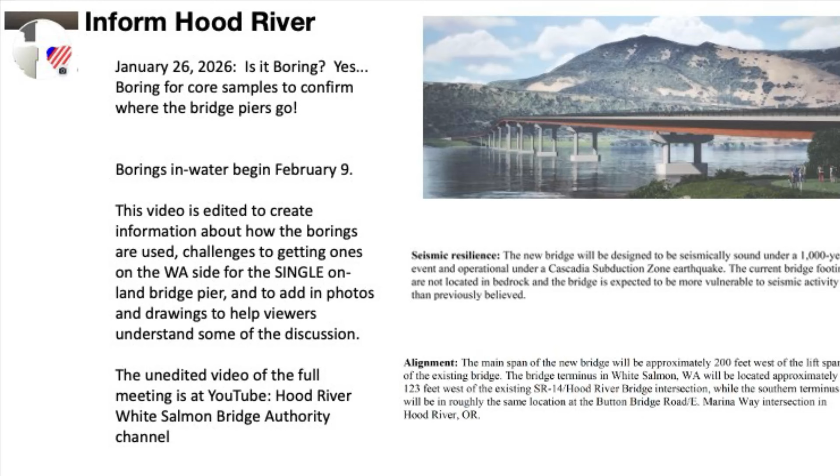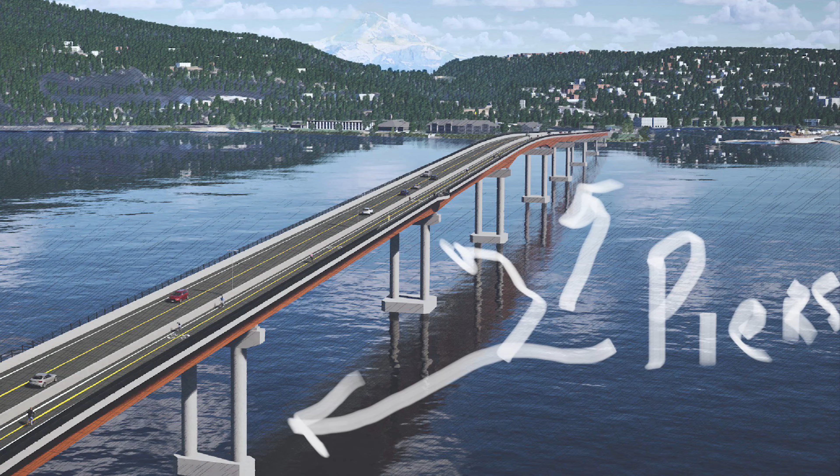The week of February 9th, the geotechnical crew begins boring at the pier locations for the new bridge, starting in water on the Oregon side. These borings will drill 2-inch diameter holes to take core samples deep into the soil to confirm that the bridge piers will be footed into bedrock. That's critical to building a seismically sound bridge. The current bridge footings aren't in bedrock.

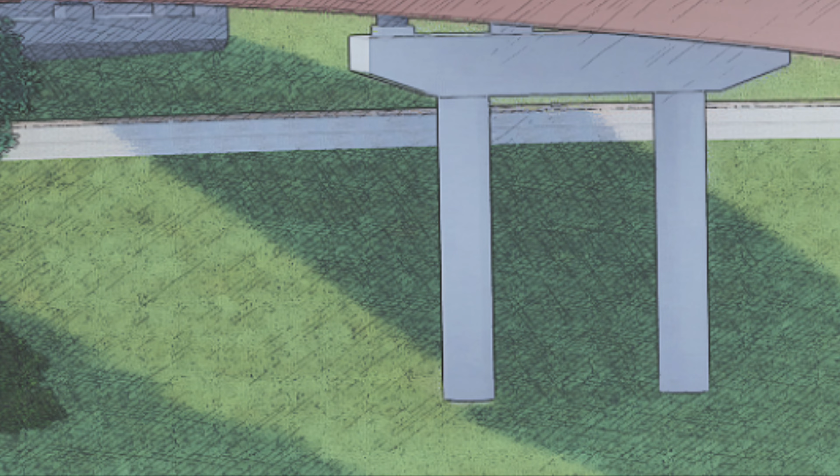The challenge, again, is access on the Washington side. The Washington side has one on-land pier, and that's located in an area with an easement held by the Army Corps of Engineers, where it'll take 6 months to get a permit to go in there and drill. But the team has a plan to move 15 feet away, and they believe that will give them a workable solution. Let's hear how that will happen.

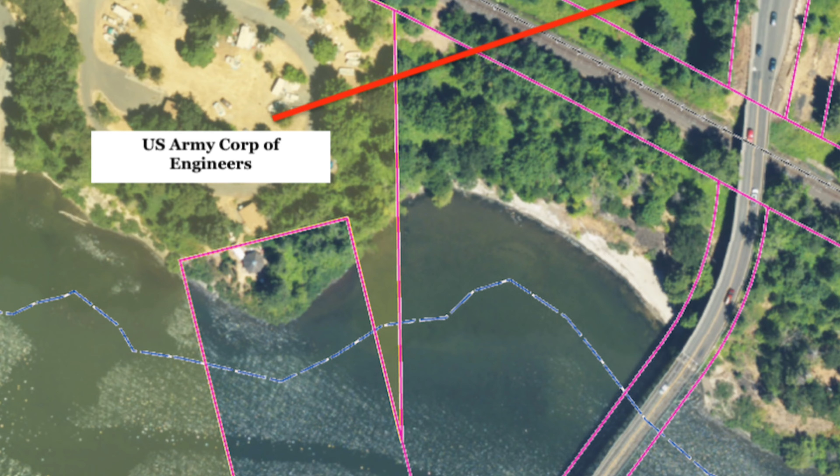In-water borings also are going to be starting here still on February 9th. So they'll start on the Oregon side. Hopefully by the time they get done with the Oregon borings, we will have the permits for them to move straight into the Washington side. We're also looking at access for the Washington on-land borings in between the railroad and the water. There's 2 borings there. We're making sure we're staying outside of an Army Corps easement. If we have to do it in that easement, it's about a 6-month permitting process to get access.

So on the borings, I thought that the U.S. Coast Guard was the permitting authority. Oregon has its own permitting, and then Washington has its own permitting processes, and some of those require different levels of reviews. And because of this access issue, you're thinking about moving those core samples just outside of that envelope, which would be roughly 15 feet away.

Yes. When you do the surveys, are you going to show where you want to do it legally? Yeah. And are you also going to show the center of the other ones and how far away they truly are? We can shoot those in. I would urge you to shoot them in. What are you worried about? I want to just make sure that from what we can see, the contour of the land, if it's off the cliff, that's one thing. If it's similar ground, at least from the surface, it gives you a little bit more warm fuzzy that you're in the ballpark.

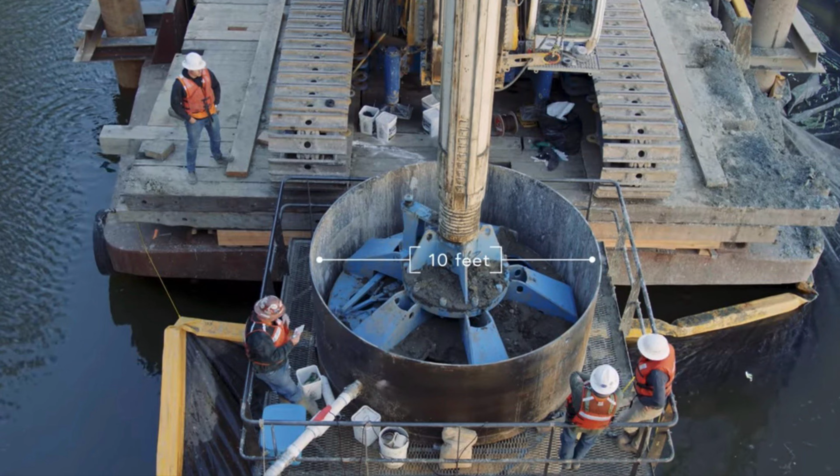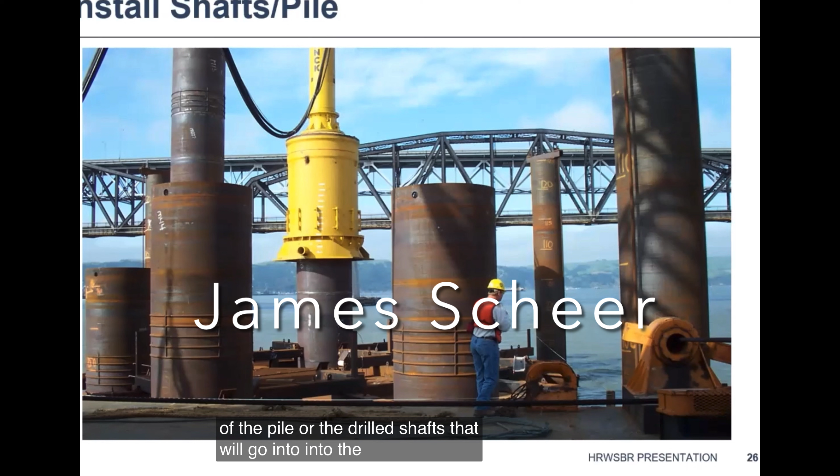Let's step back and learn a little bit more about these steel shafts sampling and what the team is trying to accomplish and why the positions matter so much. This is an example of the pile or the drilled shafts that will go into the water. These shafts in this picture are about 10 foot in diameter. Currently ours for the Hood River-White Salmon Bridge are going to be over 9 foot in diameter. It's a 9-foot shaft, a 2-inch core sample in a 9-foot circle.

The odds of you being homogeneous all the way across that 9 foot is probably... Yeah, as with anything, when you take the boring, the farther away you are from that hole, the more risk there is. Potential variability in the distance you are away, right? So if we have to take it at 15 or 20 or 30, the farther you get away, the more risk there is. And that affects pricing and risk assumptions and risk allocation for the contractors.

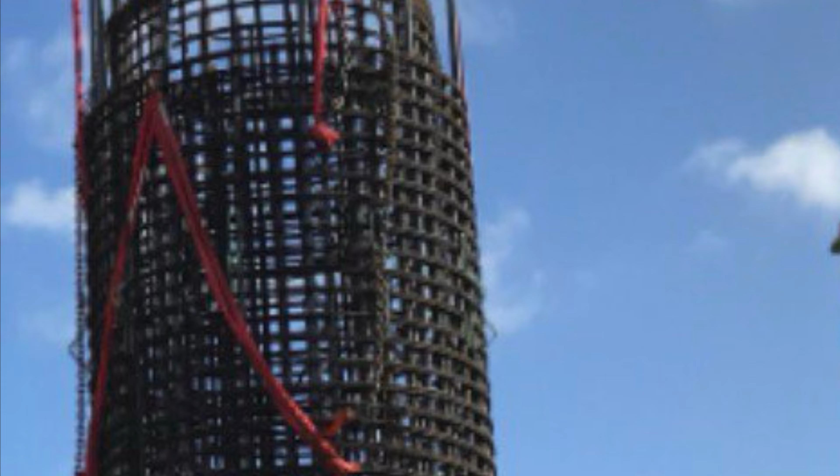The big thing is the rock elevation, wherever you hit good, competent rock, because we have to drill like 2.5 diameters, 9 foot times 2.5, into the rock. And then you have a rebar cage that's a fixed length. So you go build those rebar cages. They take a week or more to build each rebar cage. And then if you hit rock at a different place, you need a different length of rebar cage. You got to go rebuild the rebar cage and things like that. It might affect your design. So there's a level of risk. But the real issue we're trading is we're moving over 15 feet, so we don't have to lose 6 months.

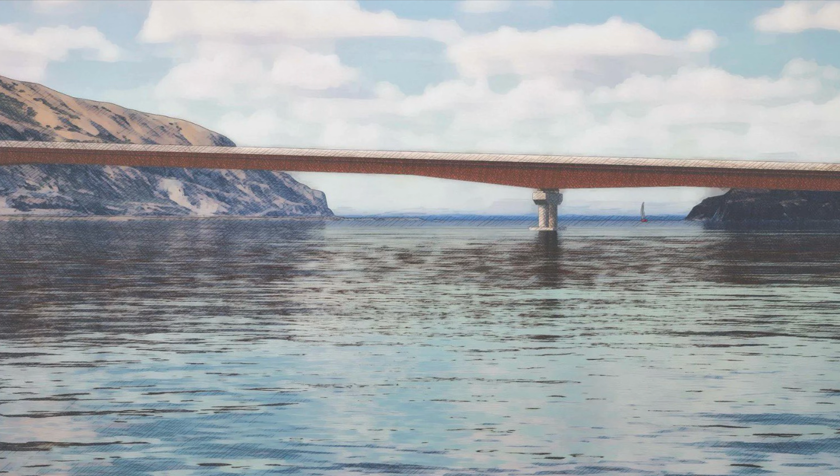Commissioner Ben Berger asked some questions about the risks associated with having only a few borings for each of these 9-foot shafts and what the effect on future change orders and costs could be. And the commission then spent some time talking about that. Change orders with rock, and borings and things like that.

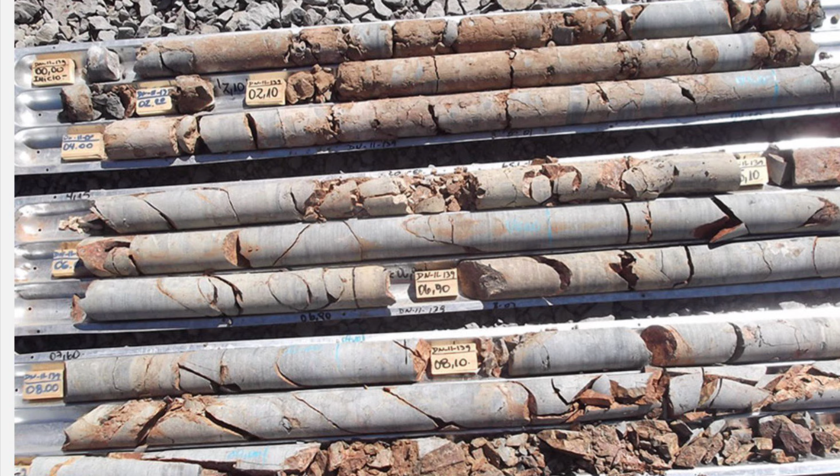And one of them you hit on is, if the borings show that it's sand and then in fact it's actually rock. That's a big thing, that the elevation at which you hit the rock is then a function of how deep you have to drill, and then it's also a function of the design. So if those are in different places, then that constitutes usually a change.

Those are some of the big things, but definitely some of the most risky work, from a design point of view and a constructability point of view on a bridge like this, is the foundations. And there's just so many different things and so many complications that could go wrong in them.

The other one that I see, when you take a look at the type of rock that we've got in the general area, it's a lot of this fragmented volcanic columns. And when you just look at the cliffs, you can see those columns coming up. And if you happen to hit a column that's halfway demolished anyway or fractured, that has a big impact on your design of your foundation to be able to consider that.

And some of it you'll find in the core sample. But remember, 2 inches out of 9 foot diameter, the odds are it's not going to be homogeneous all the way across. We're going to have to deal with it anyway. It just gives you an indication of what kind of formation you've got and where you're going to hit rock depth. But much below that, 2 inches out of 9 feet, you're still going to be guessing.

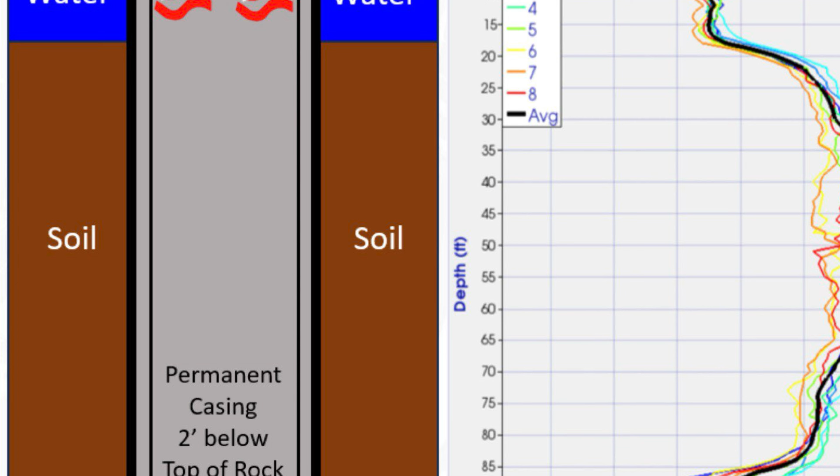That's my point. But once we know what the depth is on each of them, when we know what the sample says, we're not going to then find that when we go with the 9 foot boring and go down and have this 9.5 foot wide hole, we're not going to discover, oh my God, there's another 100 feet there. We may discover some small differences.

It's not to say that we're not going to have something similar, even with a 9 foot diameter, that you could be on an edge of one of those drop offs into a pool. You won't know it until you start drilling. But we've done a number of things to mitigate that. We've vetted the holes where the pier sites. We've come through and we've targeted our drill holes for those.

If we see something weird when we start pulling them up, we have a contingency already allocated so that we can go back and drill some additional holes to see if we can get enough information to verify it ourselves.

So, I mean, out of how many piers, I can't remember how many we're doing now, 20, 40 some odd. And we've got one that we're going to make a deviation on to save 6 months. I think we're actually not moving the piers. We're just moving where the sample is going to be taken. Right.

We may, if we find out something there that's unique, we may go back and do an additional hole closer to the pier, or we may move the pier to where the boring is so that we know better. And we'll make those decisions when we gain more information.

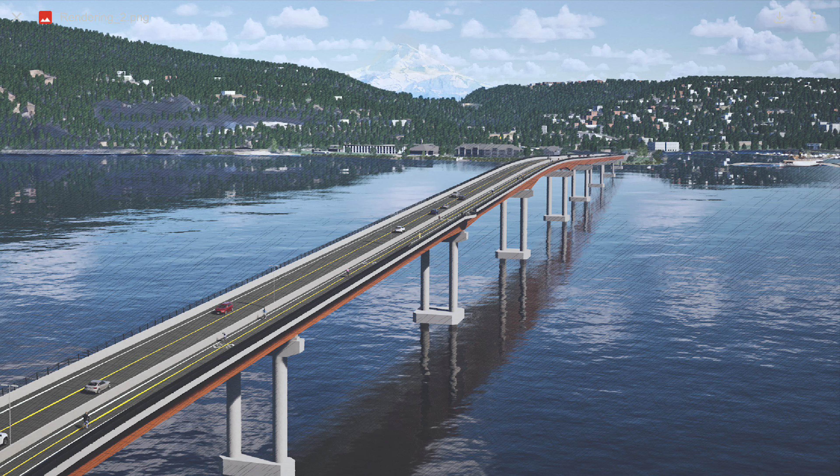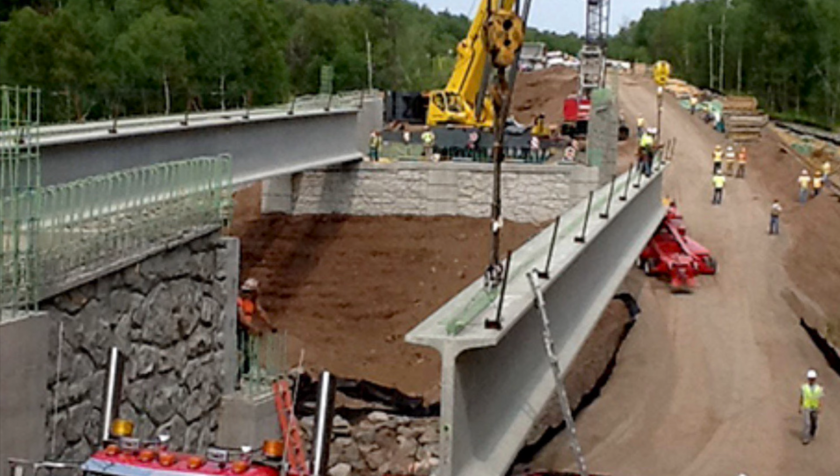But for those of you who didn't hear the question and answers from the bridge group last fall, here's a little sampling that gives you information about the different parts of the bridge and its various components. That helps as you listen to regular meetings when they talk about girders, piers, shafts, piles, and all sorts of other terms that many of us aren't that familiar with.

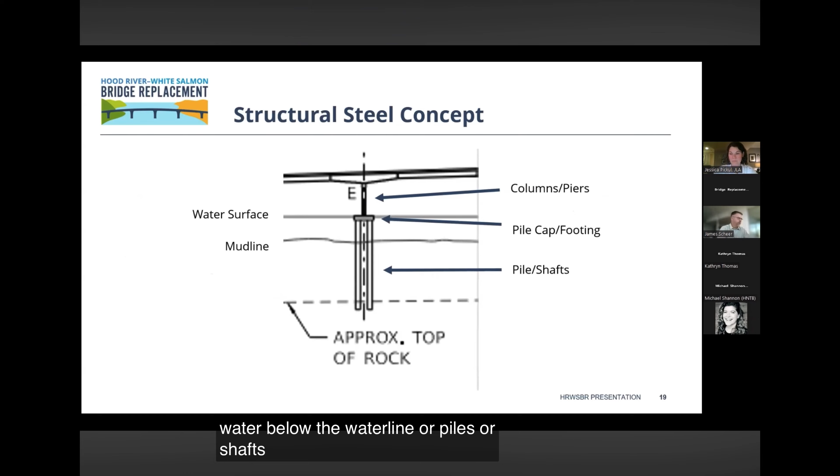In the water, below the water line are piles or shafts. We're going to have 4 to 6 pile per footing, and then on top of the pile there's a pile cap. So that's a big concrete block that ties all those pile together and helps them act as one unit.

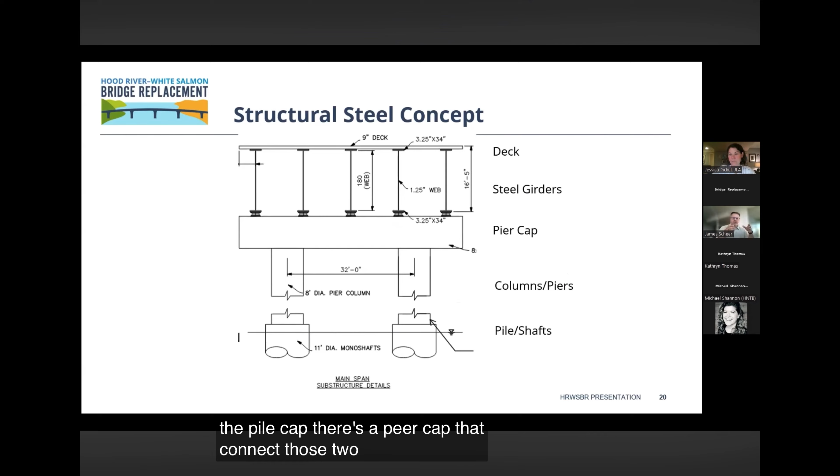From there, there's going to be columns, concrete columns going up, and then on top of the columns is a pier cap. So similar to a pile cap that connects the tops of those two columns together and gives it some rigidity there. And then on top of that is where we place the steel girders and then the bridge deck that will be the driving and walking surface.

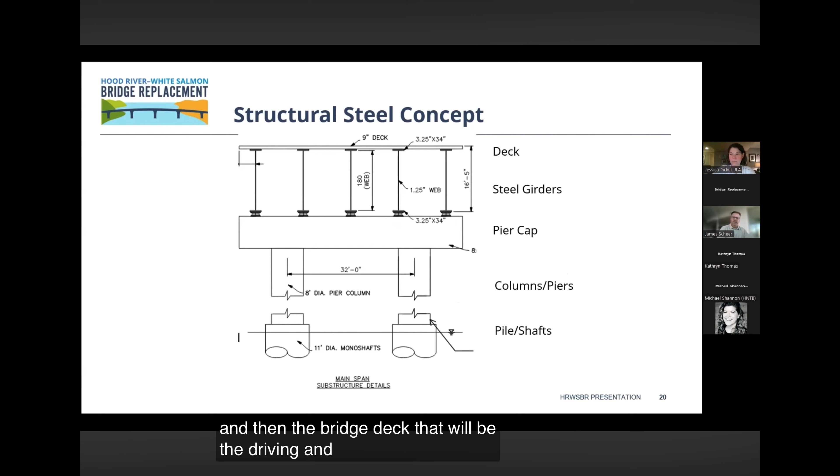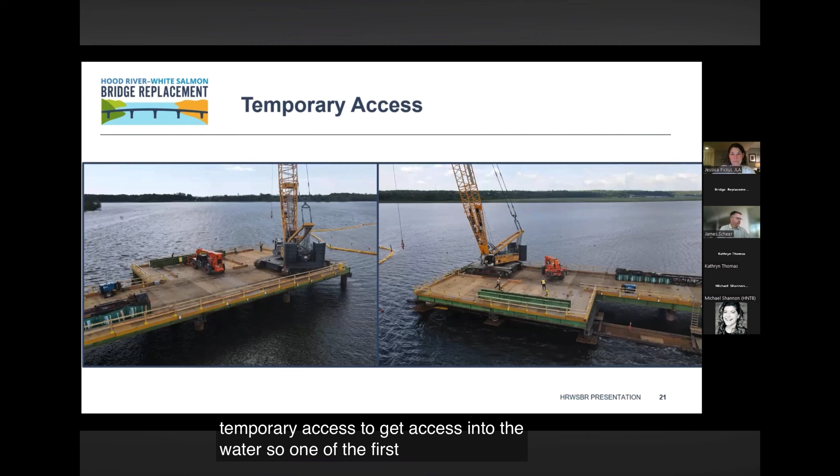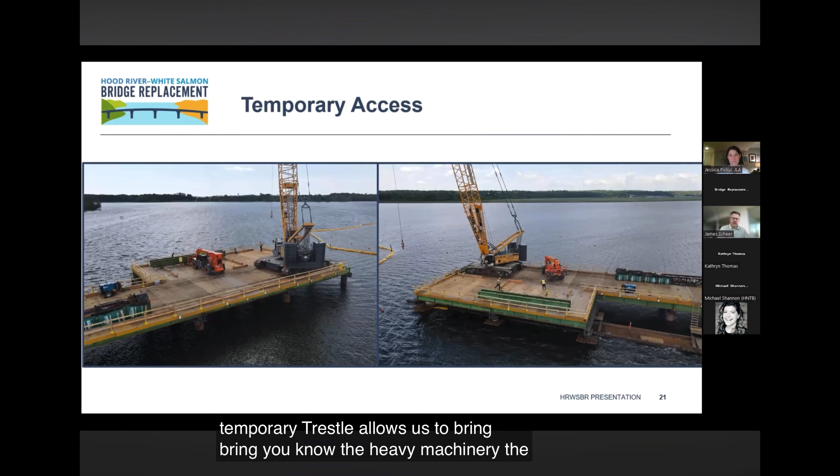So in order to get all that going, you have to go out and build some temporary access to get access into the water. So one of the first things you'll see us doing is we'll start driving pile and building like a temporary trestle that will go out into the water. That temporary trestle allows us to bring the heavy machinery, the cranes and the equipment and the material that we need to be able to build the bridge.

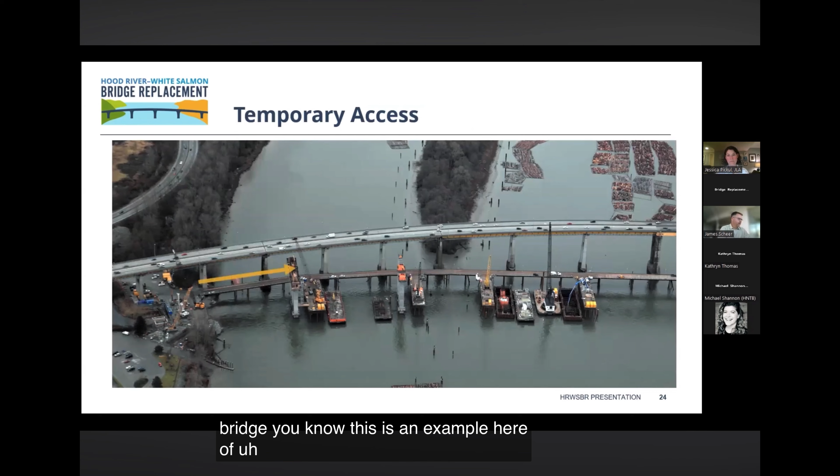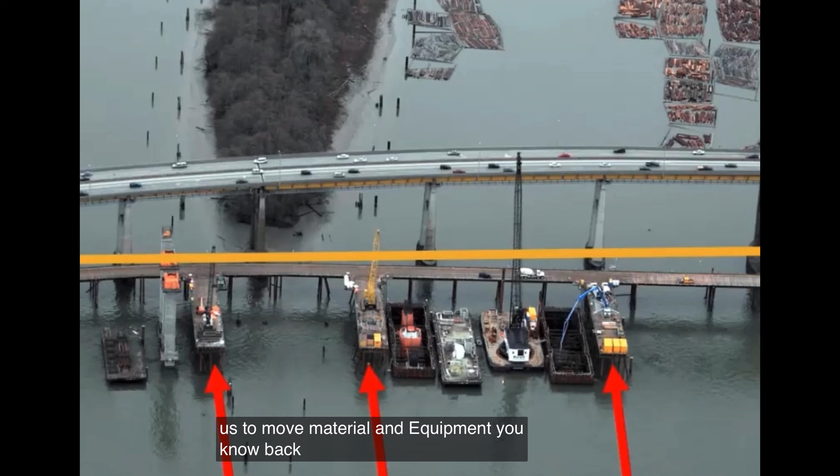This is an example here of what's called the main line of the trestle, and then the red arrows there are fingers. And so the main line of the trestle allows us to move material and equipment back and forth from different pier location to different pier location.

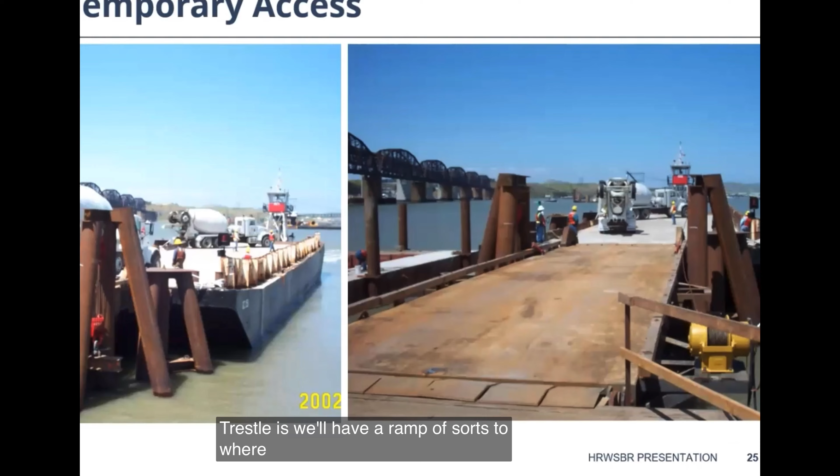And then one of the things that we'll most likely have at the end of our trestle is a ramp of sorts to where we can bring a barge in, and then we can lower the ramp down onto the barge and drive concrete trucks and put material onto the barge and then take it out to the bridge.

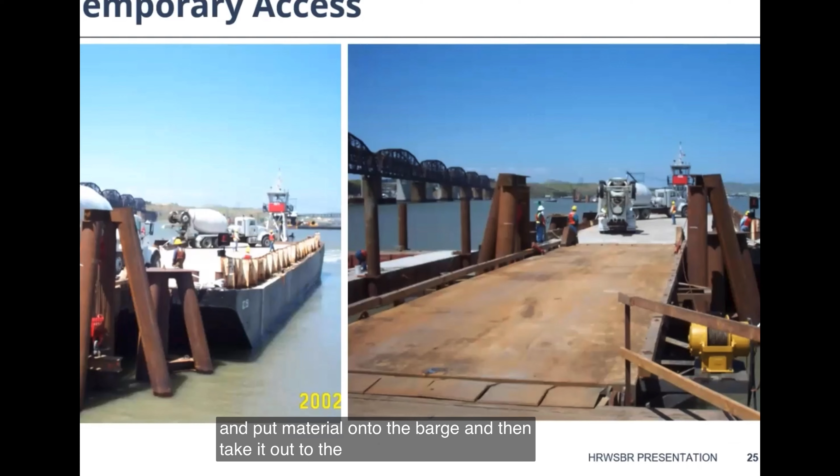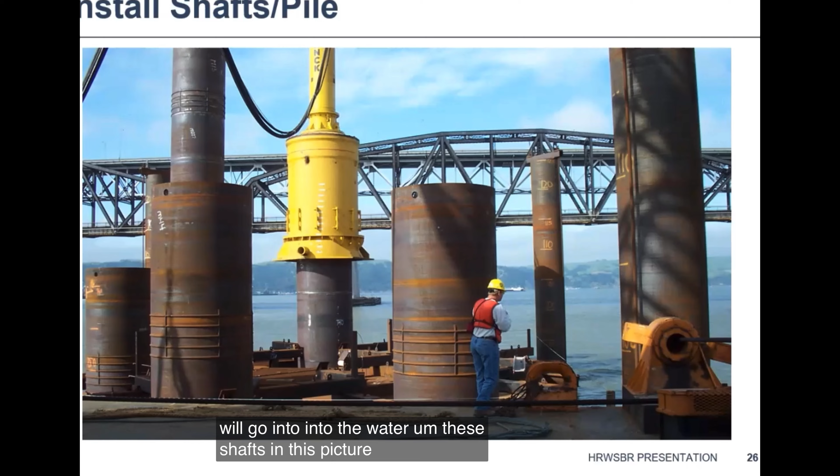So once we have all the temporary access in place, then we can start really building permanent structure. This is an example of the pile or the drilled shafts that will go into the water. These shafts in this picture are about 8 foot in diameter. Currently, ours for the Hood River-White Salmon Bridge are going to be over 9 foot in diameter.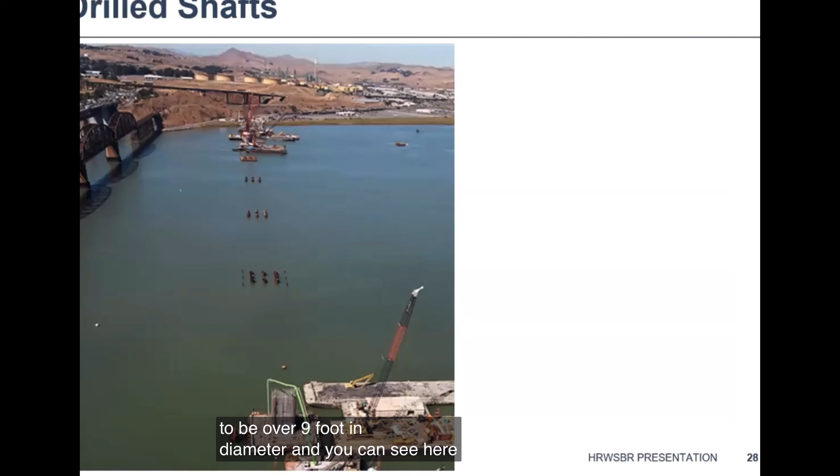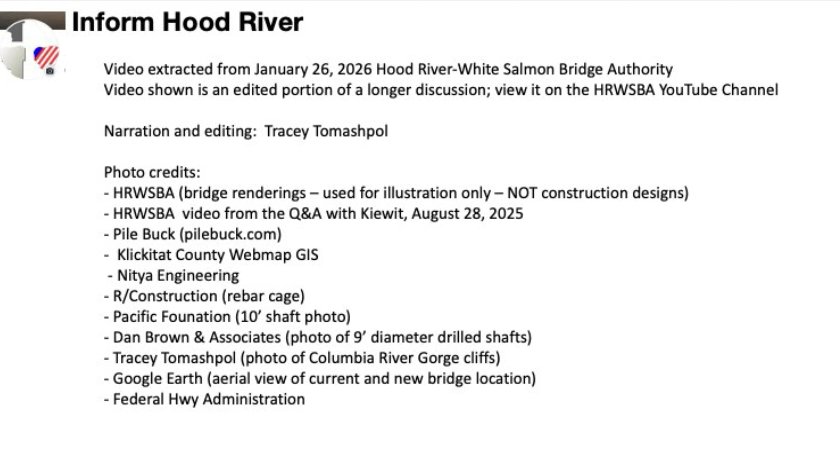And you can see here in this picture, we've got the shafts installed at a couple different pier locations. And while those have been installed, we're continuing to work in other locations. We should be seeing some of that sampling work going on beginning the week of February 9th, also on the North Shore of Washington. And at the next Bridge Authority meeting, we should get an update.